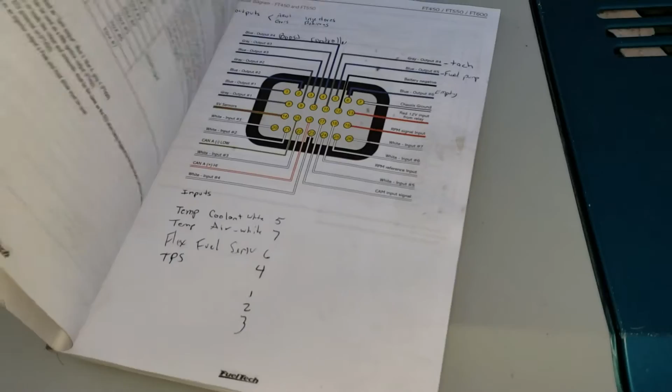Today we're gonna do a really short video on the FT450, the one I got. The FT450 is the manual that came with the car, and in my opinion, it's very simple. It's got a bunch of things that tell you what the 450 has, the 550, and the 600, more or less.

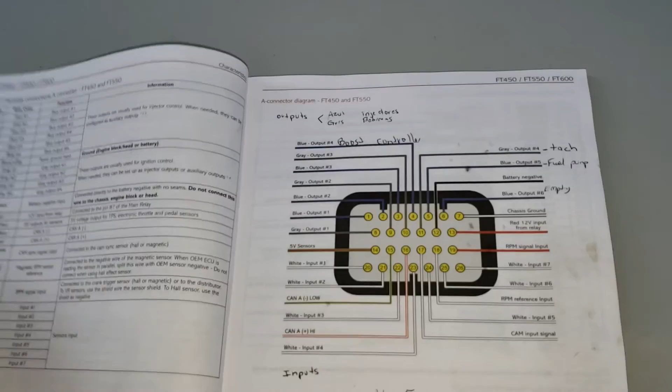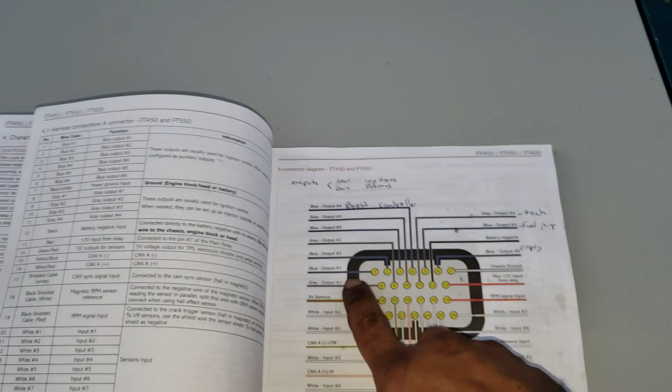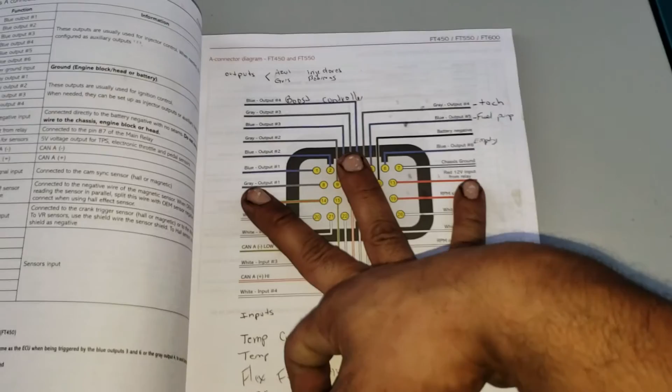So this is kind of how I wire mine. I'm gonna go to my computer over there and show you guys. Let me see if I can explain this real quick. The blue ones, I think, are for the injectors. I'm running sequential, so I was using 3 outputs for 6 injectors, 2 per injector, 2 per output. That's how I use 3.

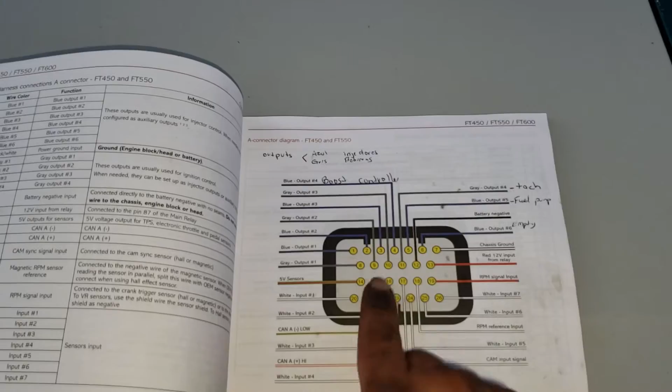Then my 4th one I use for the boost controller. My 5th one I put for the fuel pump, and my 6th one... no, my 6th one is empty, and that one is gonna be for the VVTi, because I'm gonna be running VVTi, and eventually Fueltech is gonna control VVTi. So that's why it says empty in there.

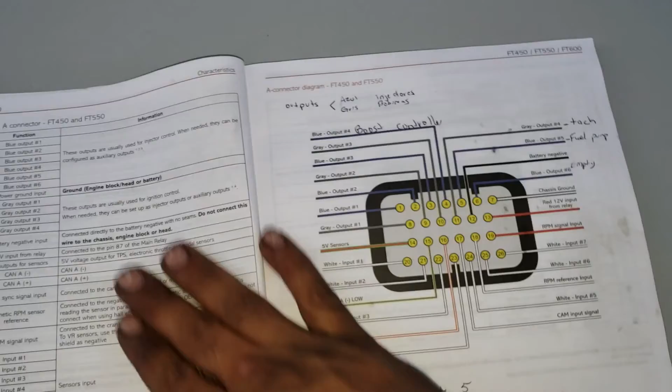Then for my... let me see, that's for the gray outputs. The gray outputs are for the coils. I use 3 because I'm running wasted spark, so 1 wire per every 2 coils, and that's how I'm running that. Then my 4th gray one is for the tachometer.

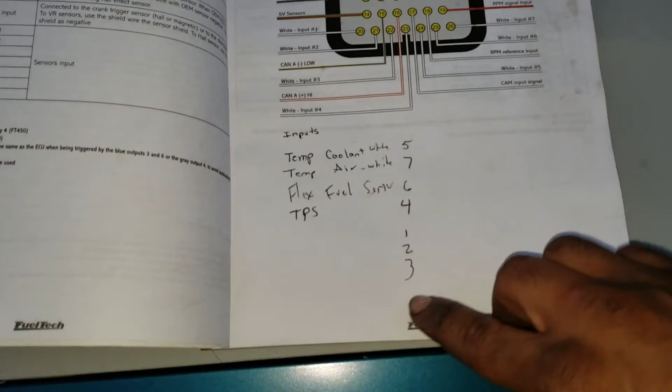All right, so inputs, this is all my inputs. I don't have it all listed here, but 5 for coolant temp, 7 air temp, flex sensor 6, TPS 4. I'm running, I forgot, 2 more things on my inputs, where I only have 1 left. So I'm running 6 things on my inputs. I forgot, I'll check on the computer now.

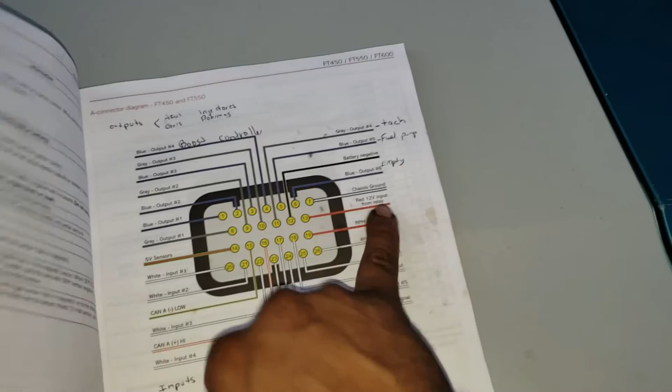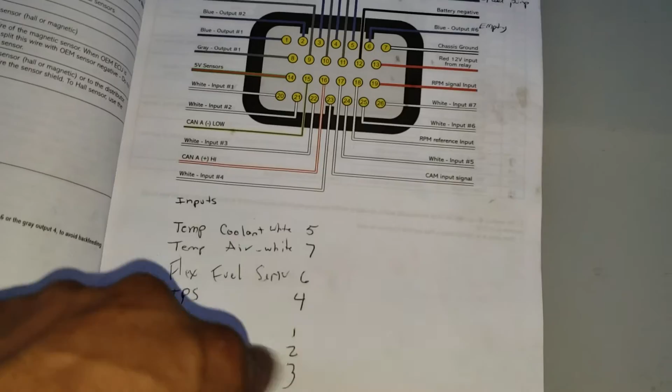And then the rest is straightforward. You've got chassis to ground, 12 volts from relay, RPM signal out input, which comes from the crank. All right, and then you've got more inputs here, these are the same inputs as the ones over here, these white ones. Those are our inputs. And the 5-volt sensor that I have goes to my TPS.

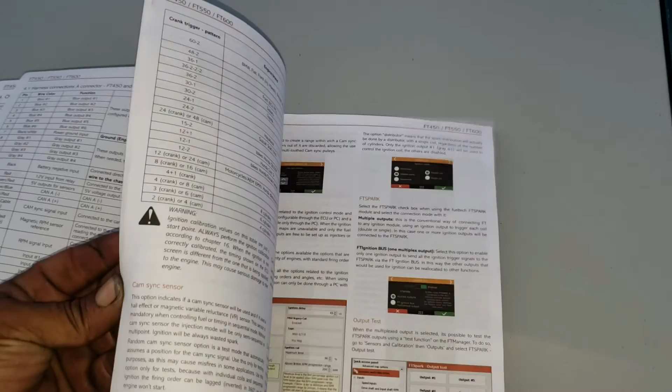And that's pretty much it, man. It's fairly simple to wire, and you have a lot of options. This thing comes super detailed on every single thing you can do with this little computer. So let's go over to the car. All right, let's jump over to the car.

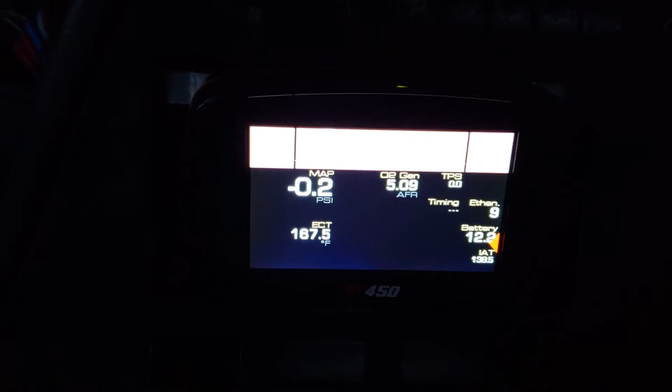Right, so I'm gonna do the best I can to show you guys this. I'm gonna turn on the AC because I'm gonna be here a little bit. Let me see, how do I turn this thing on? AC... wait, not here. Oh, it died. Still cold.

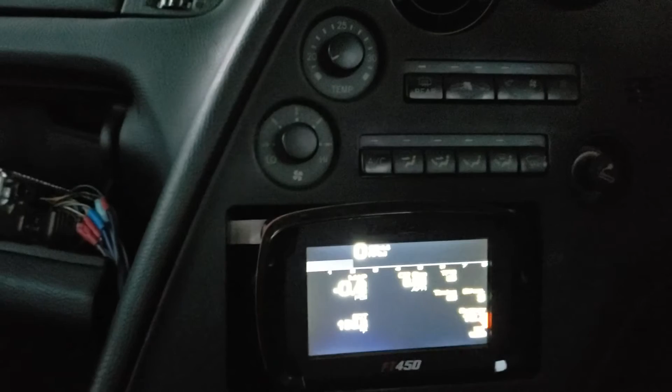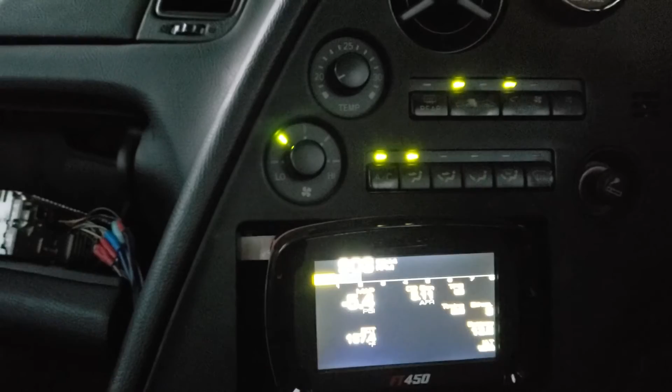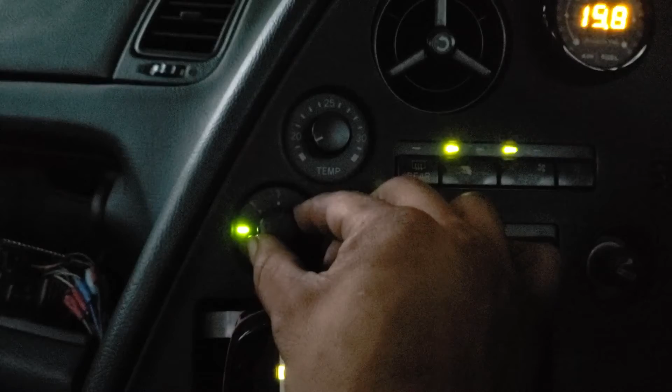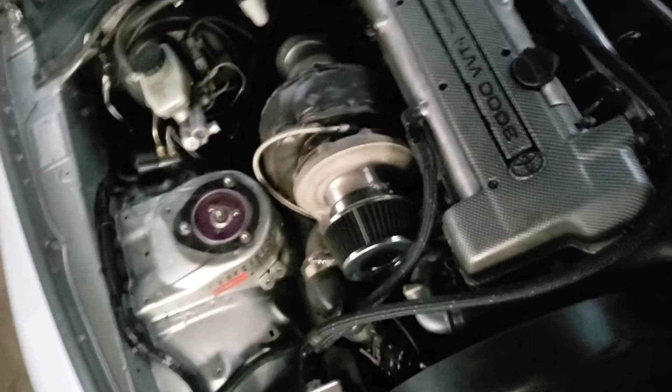I gotta bring up the RPM over there. So I brought up the RPM a little bit. Let me see if it turns off now. I'm still gonna have to bring it up a little bit more, it's still a little too low. Let's bring it up. Let's see now. That's a little better, still a little low. I didn't move it much.

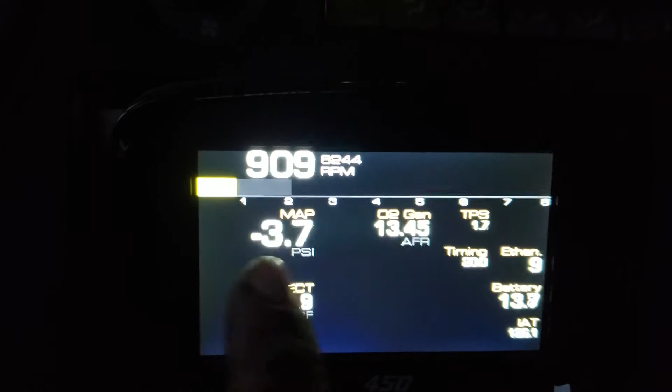But my first display here, let me show you what I got. I got my MAP sensor, whatever it's reading, RPM. I got my engine coolant temp, this is not calibrated yet. My air fuel ratios... let me see, you see it's running a little bit lean, running way too lean. That might be my problem.

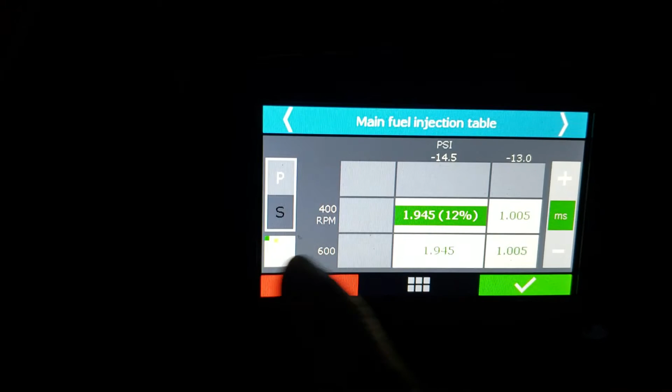So I go to main fuel, and then I click this little bubble here, and I see here it's way too... oh, you see it's fixing the idle. So there. Let me give you a little more fuel.

Yeah, fixing the idle right now. Let me play with this thing a little bit, see if I can make it better. Alright, let's see, let's turn on the AC.

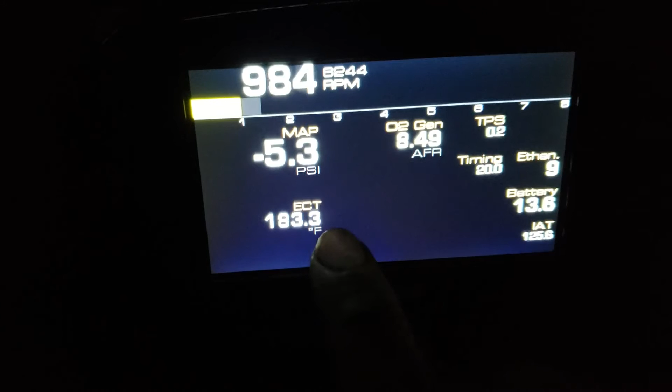That's a lot better. Alright, let's continue with this part. Engine coolant temp 183, batteries at 13.6, usually it sits at around 13.8. Air temp, intake air temp 125.

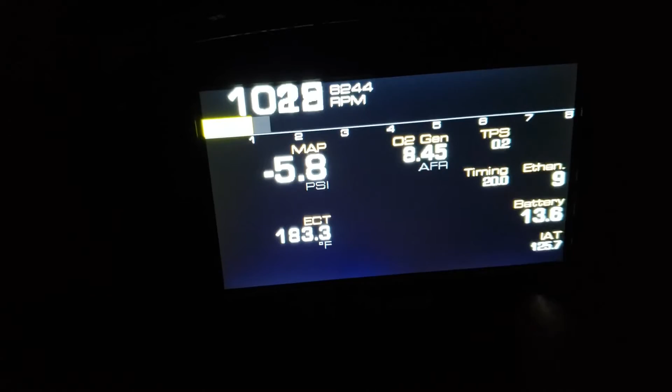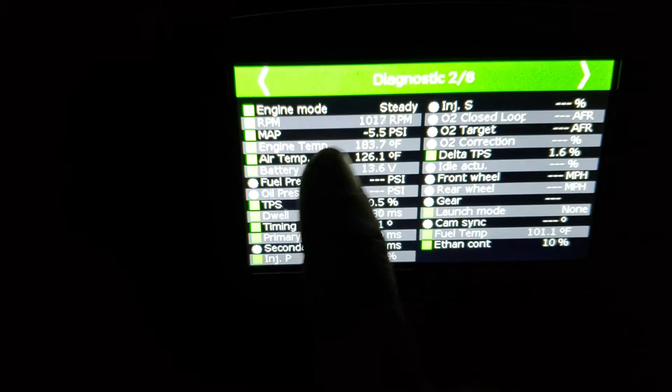Alright, once you click here on the top, it goes to all the features. So this is where we're at in the dashboard. I'm gonna go one by one. Diagnostic panel, this is where you go and see everything going on in the engine. It says engine mode steady, you see RPM, MAP, you see all the signals over here.

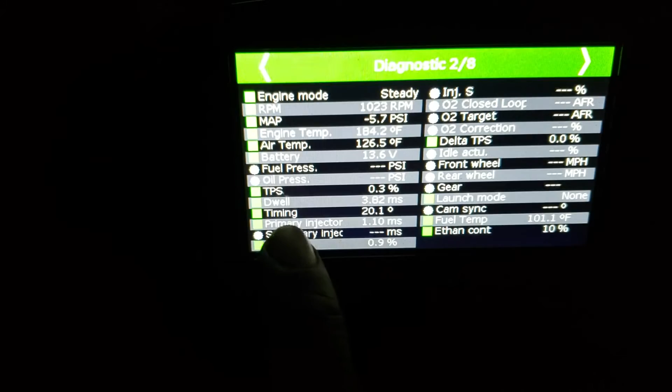Whatever is throwing TPS at 0.3%, some little percent in there. The dwell time, the timing that I'm running at idle is 20 degrees. Injector, primary injector, I don't have a secondary. And 0.9%. Oh, go back.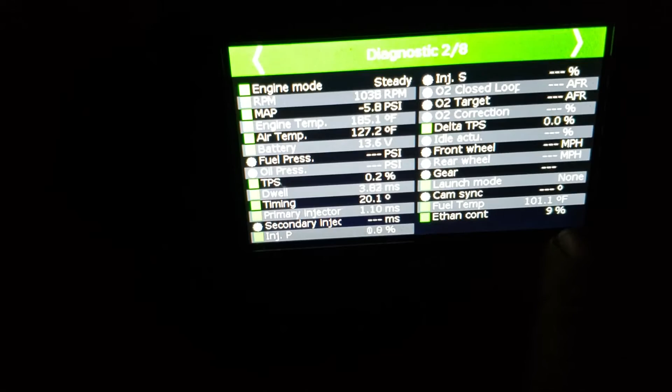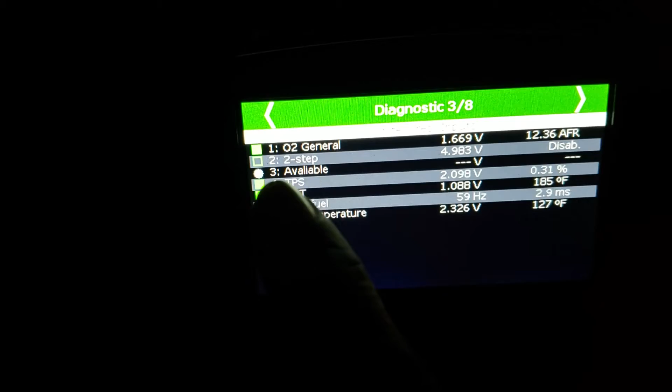I don't have any of that, I'm not using any of that. The TPS, these are basically ethanol content at 9%. Fuel temperature at 101, I don't know if you know how it's getting fuel temp, but next window, the O2 general sensor that needs to be calibrated. Two-step is off, it's disabled. TPS and your coolant temp, it tells you the voltage over here.

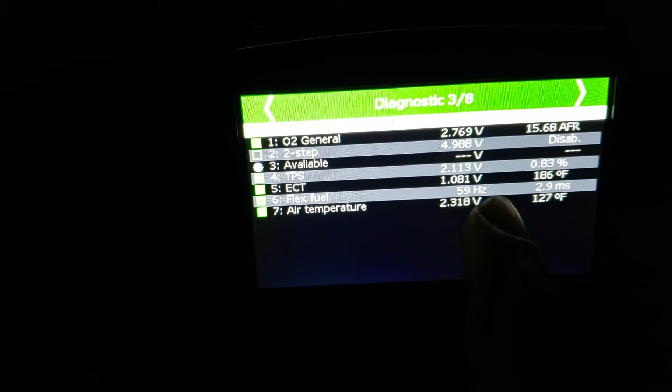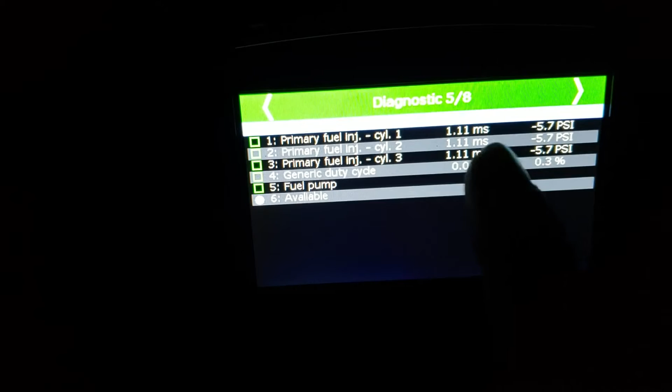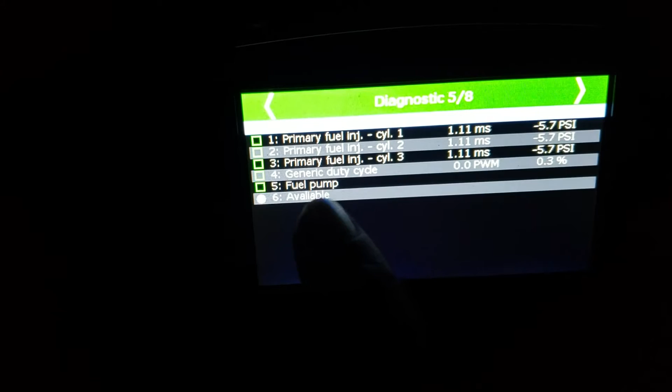Alright, so we go to the next window, the injectors, the time in milliseconds, something like that. And you see only 3. And then the output for this is for the boost controller and fuel pump. There's nothing in there because I'm not running any boost right now.

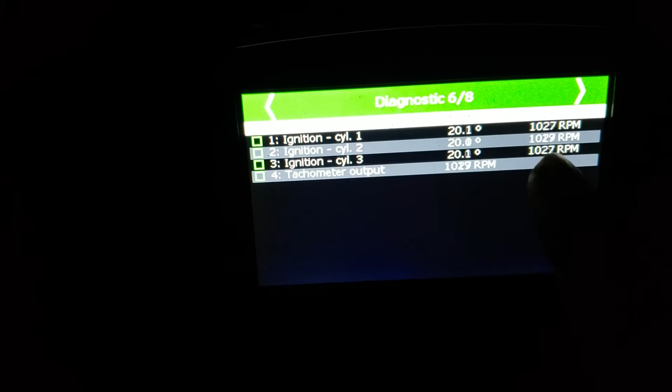Same thing with the ignition and the tachometer. This is the RPM, and this is the ignition and the degree and the RPM, the whole 9 yards. And then if you got anything going on, you can just hit this little part and it will diagnose the car if it's got something running or something wrong. Alright, let's go back.

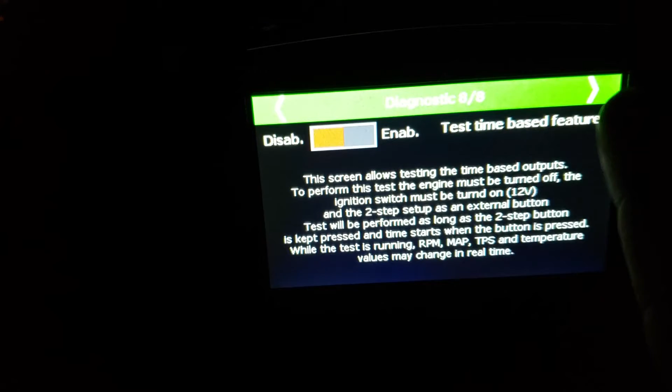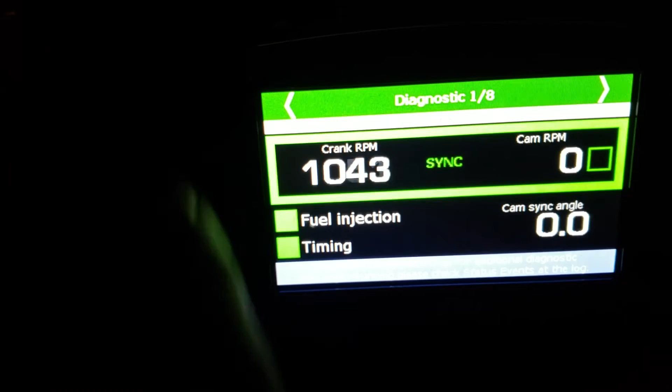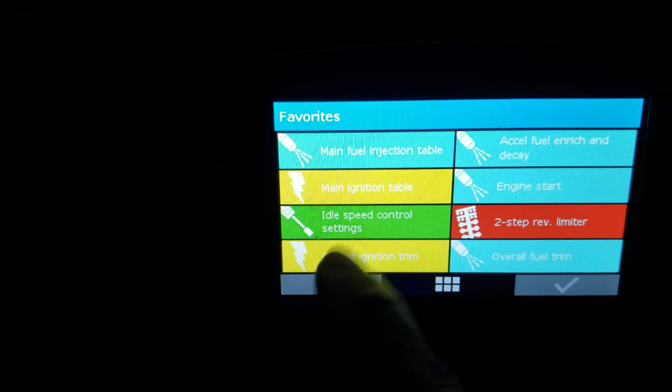Oh, and this is the screen in the front. I'll go back. Alright, so then we go to the little star, which is favorites, but I'm not gonna do that right now. This is when you want to go to something quick, you hit favorites and you go there.

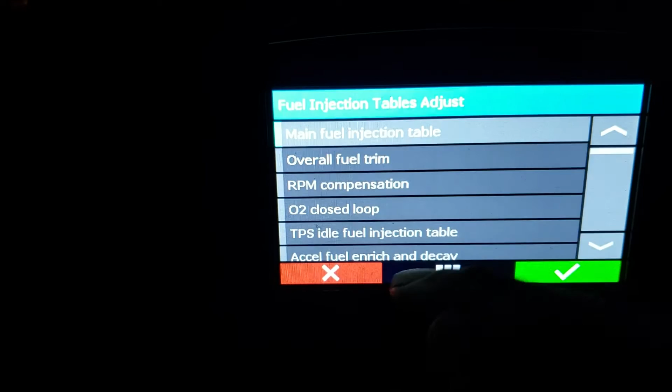Oh sorry, injection, main fuel table. This is what I like, this is where I be most, playing with the fuel. This is when you have it in advanced mode. When you have it in simple mode, it's just like a little graph. And then when you have it in advanced, then you can go cell by cell.

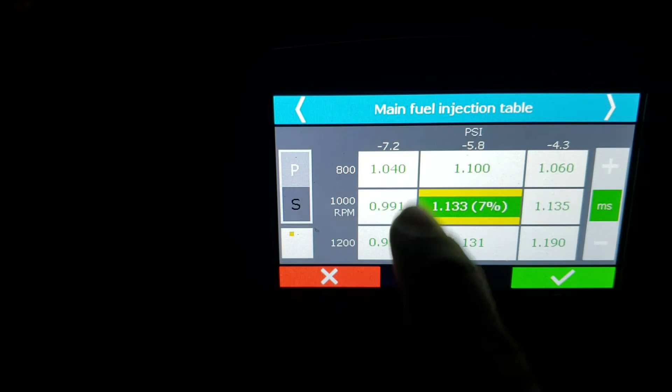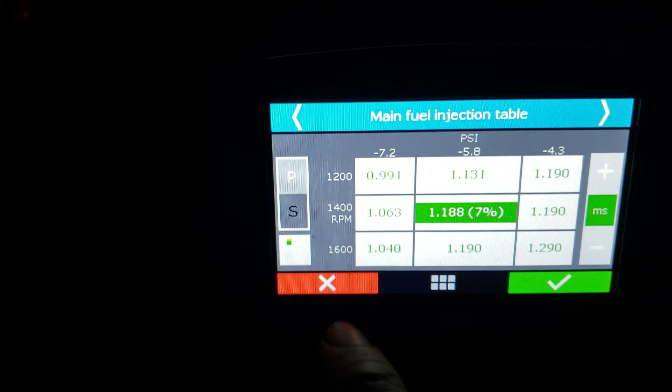You click on the cell and it will go to yellow. Yellow means that's where you are at. If not, then you can just play around the cell, like use RPM, PSI, the whole 100 yards in there. Overall fuel trim, if you want to go up and down in the map, like add more, take more, that type of stuff. RPM compensation, O2 loop.

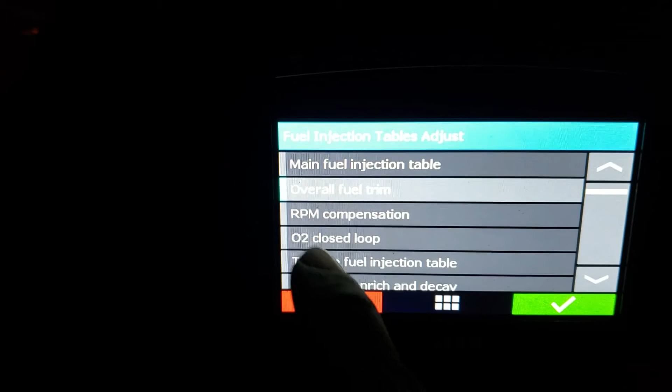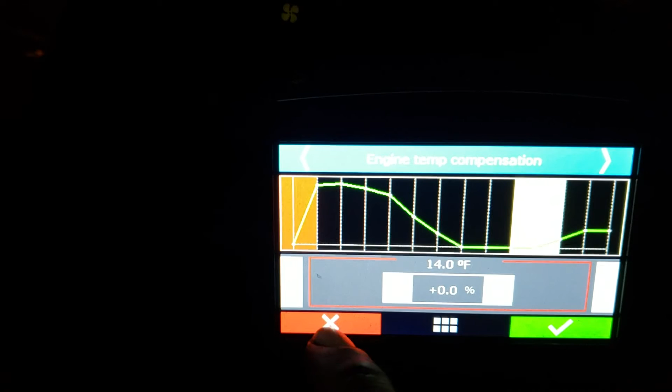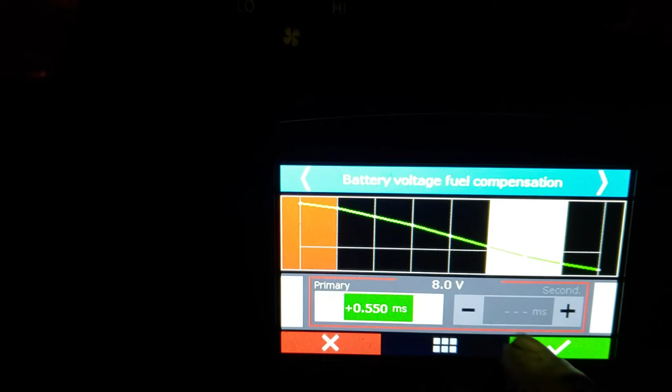Engine temp, I do play with this a lot. This is very important, like when the car is low, how much fuel you take out and give some more, very important. Intake, the same thing, voltage, fuel compensation, this is for the injectors. Very important you set that, because if it goes below the voltage, then it's called dead times.

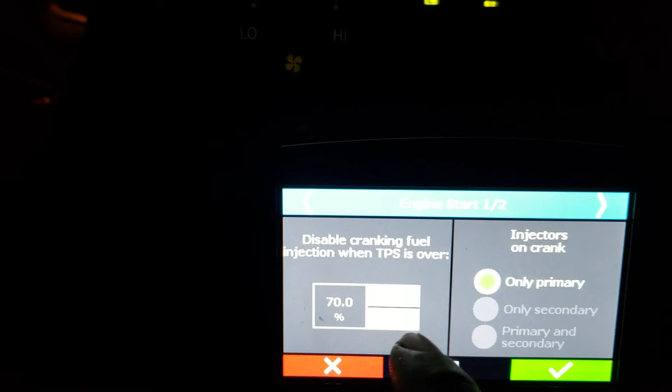TPS, prime, engine start, this is very important too, for when you want to start your engine. Alright, so let's go to ignition.

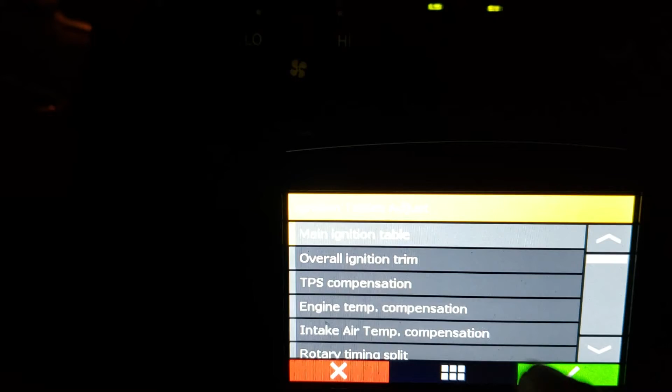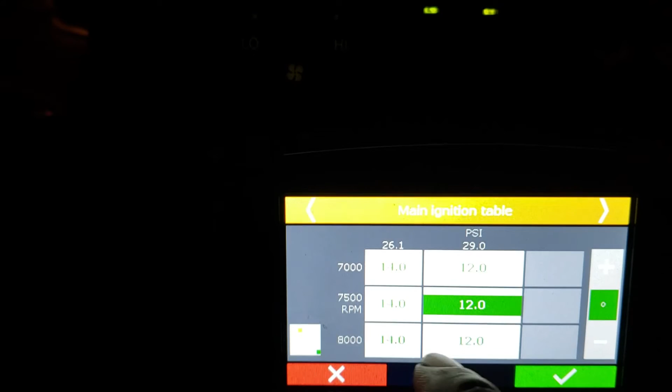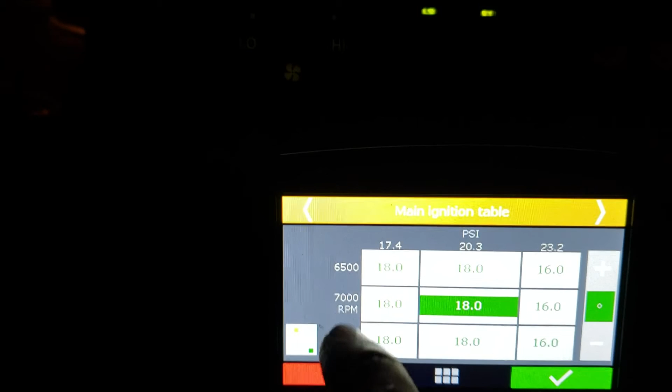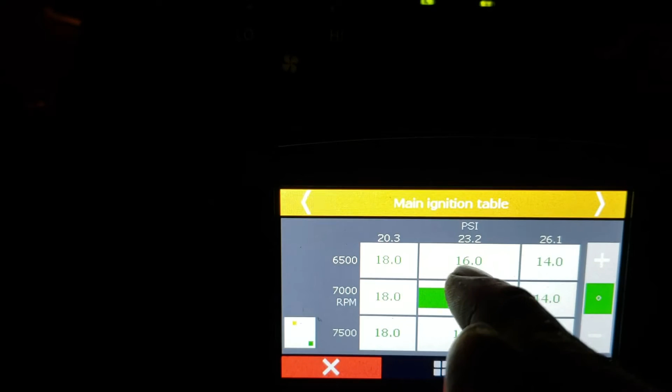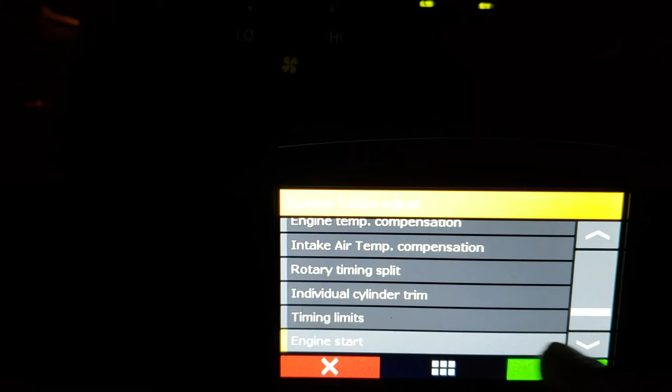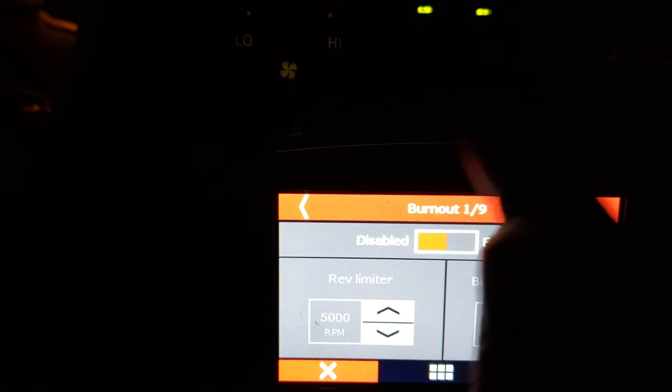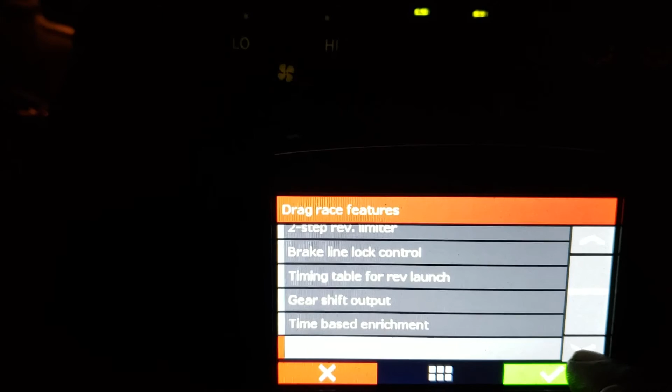Now let's jump into the drag race features. This is my favorite part, where you can set your burnout. I have it disabled, but here you can set how high you want to go, your RPM, so you don't rev it all the way up. 3-step, 2-step, brake line lock, timing table, gear shift, time based enrichment, pro nitrous, the whole 9 yards. This thing has staging control, technology, everything.

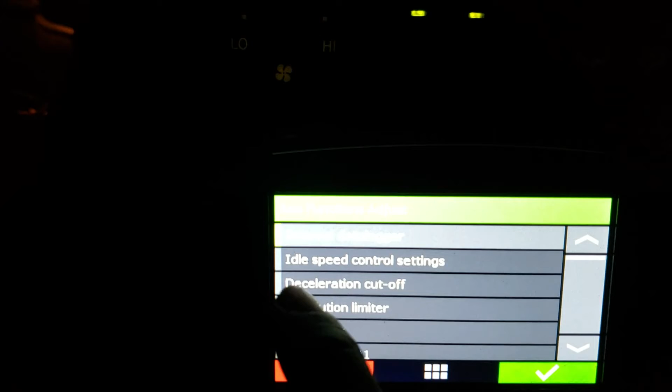This also has an internal data logger, idle control. Let me see which ones I use. This controls electrical, shift light, revolution limiter, air conditioning, which I'm using, and fuel pump.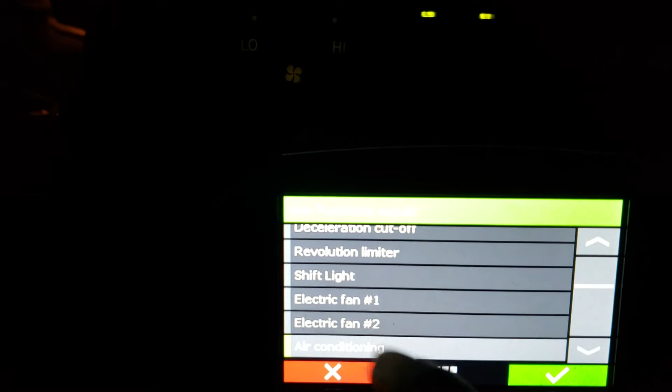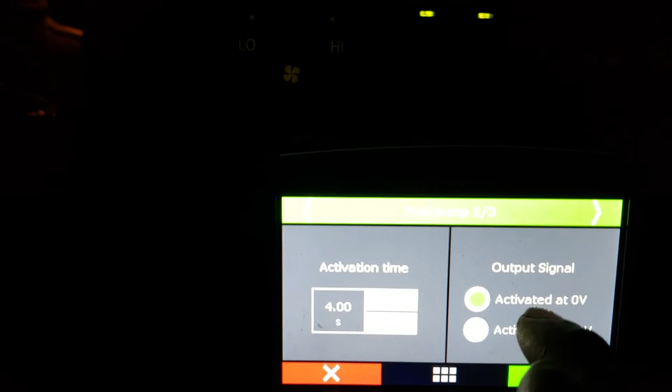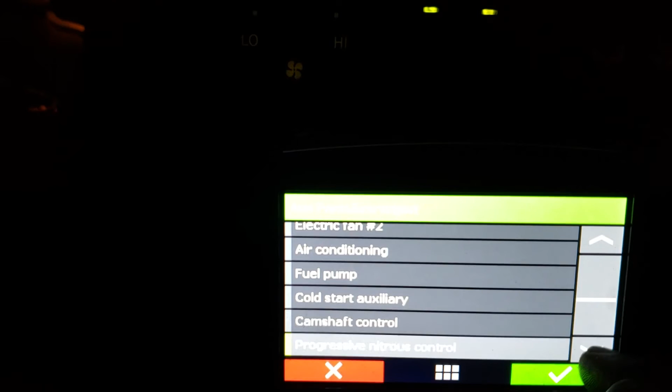I have it timed, activation time 4 seconds for prime. I have it running negative. I'm not running. The output signal is negative, it goes to a relay. Cold start, camshaft control - this is what we're gonna be playing with later on the VVTi.

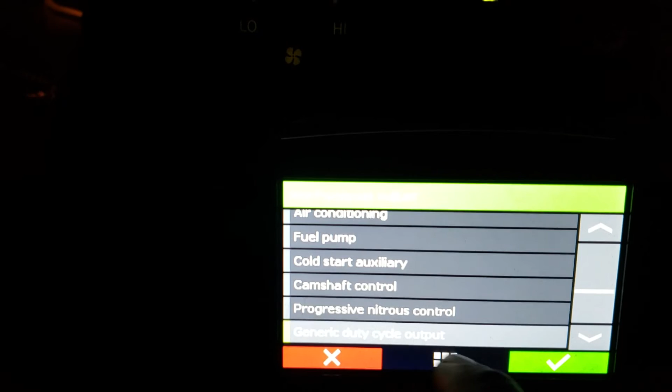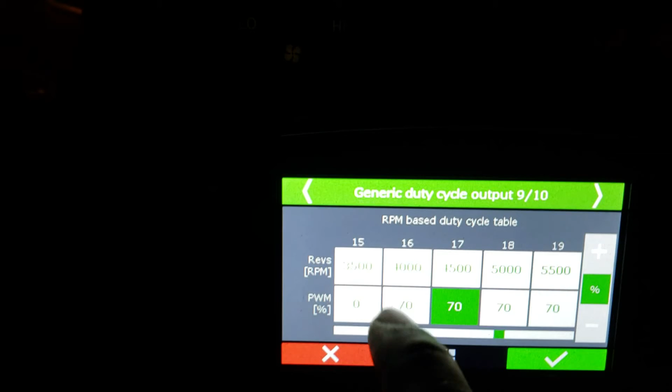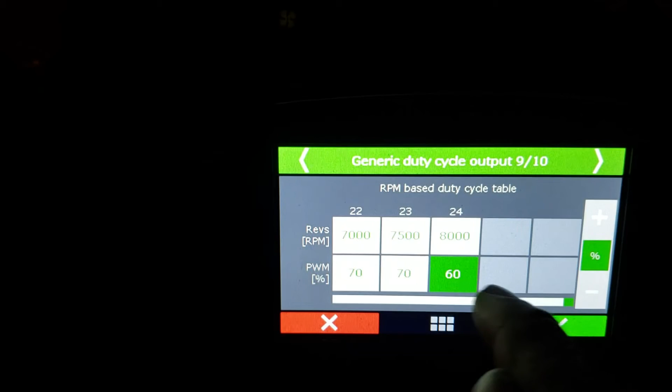Let's see, progress, generic. This is where I do my boost controller. Go here, so you see that. When it starts hitting 4,000, that's when you start seeing my solenoid opening. Then I have it maintained at 70 all the way to 8,000. So this will give me 23 pounds, and then it will drop right before I shift.

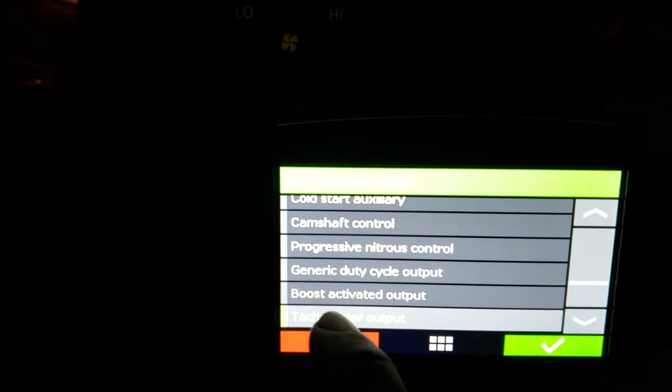Boost activated output, tachometer output, wastegate pressure control - I'm not using that one. Start button, if you want to start it with your button, traction control, generic output.

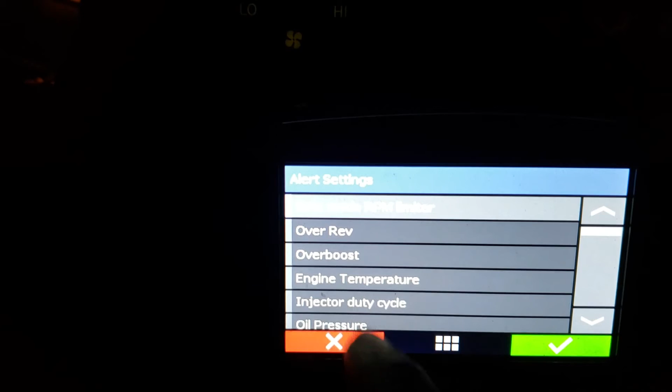Let's see the alerts: safe mode, RPM limiter, overboost. These are all the features it's got to protect your engine. Oil pressure when it drops, minimal oil pressure, low fuel pressure, O2, low temperature, high temperature, all those things.

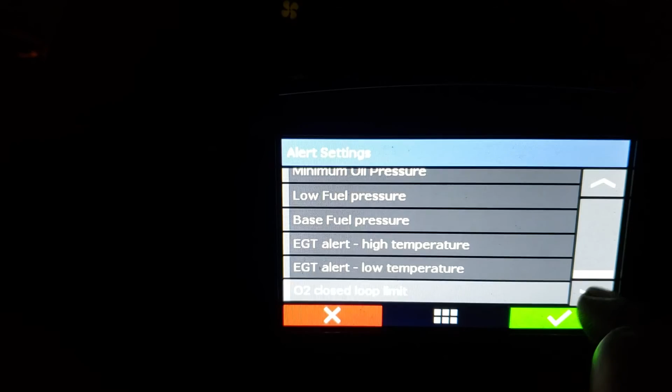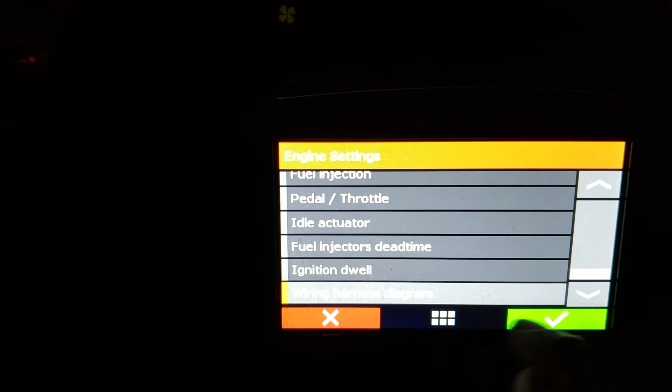Engine settings is when you're setting it up, when you put it on - this is where you set up everything. The wiring harness tells you where you have everything connected. White 1, 2 is 2-step, 3 - I still got that one available. TPS, engine temperature. Then we go to the blue ones.

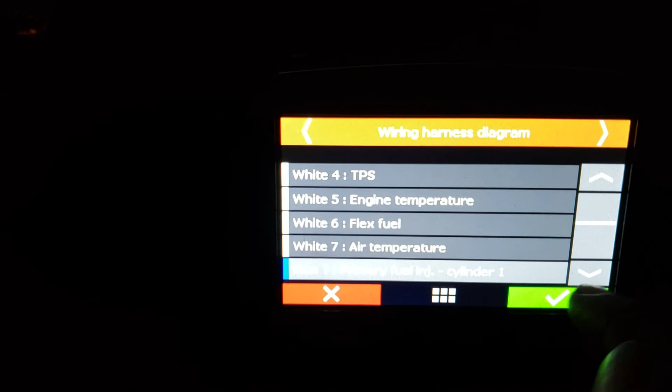Cylinder 1, 2, 3 are for my injectors, 4 like what I explained earlier. I still got number 6 available. Same thing with the grey ones - I'm using all the grey ones.

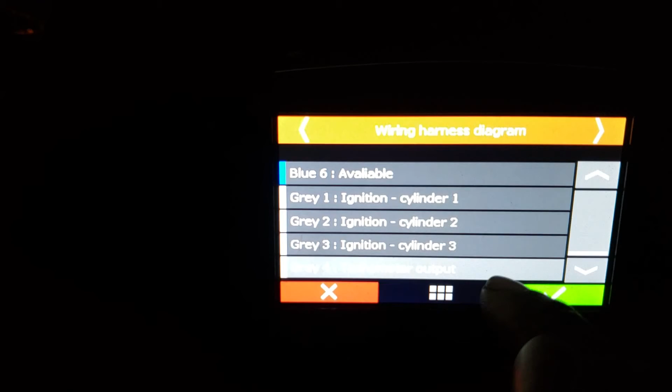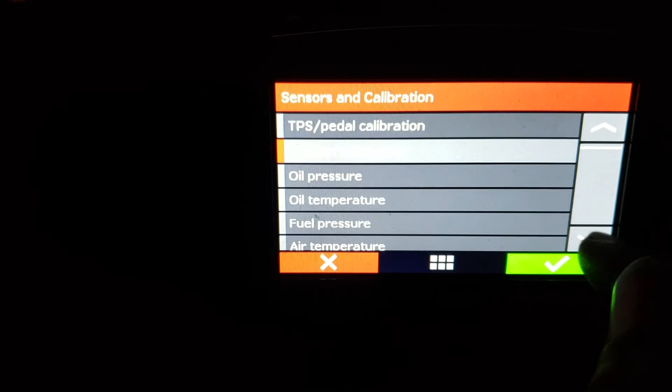And then let me see what else - sensor calibration, very important, this is where I calibrate everything: TPS, oil pressure, air temp. This is where you calibrate every single sensor that you have in the car.

And then this last one is for your first map, second map. You can put up to 5 maps in here, edit and take out, and the whole 9 yards. So this is kind of like the overview of the car.

So that is an overview of the FT450, and it is available right now.